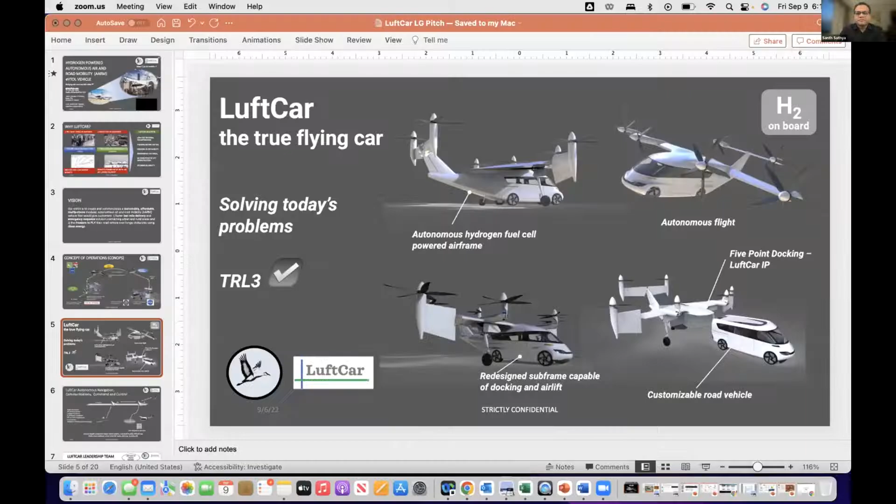LuftCar is trying to create a bridge between the road and the skies. It is an age-old dream for humanity ever since we took up flight, the ability to fly and drive. There have been so many concepts shown in movies, and so many attempts in the past to bridge both modes of transport.

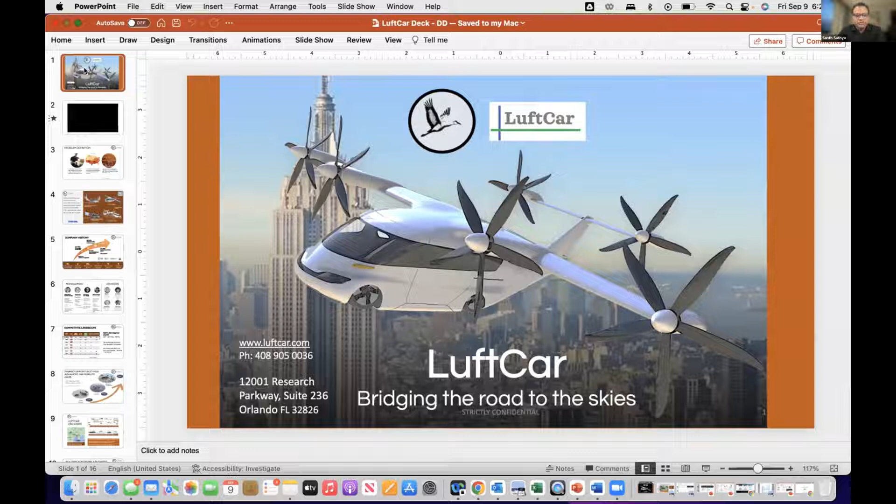I want to show a quick one-minute video before I talk about the problems that we are solving.

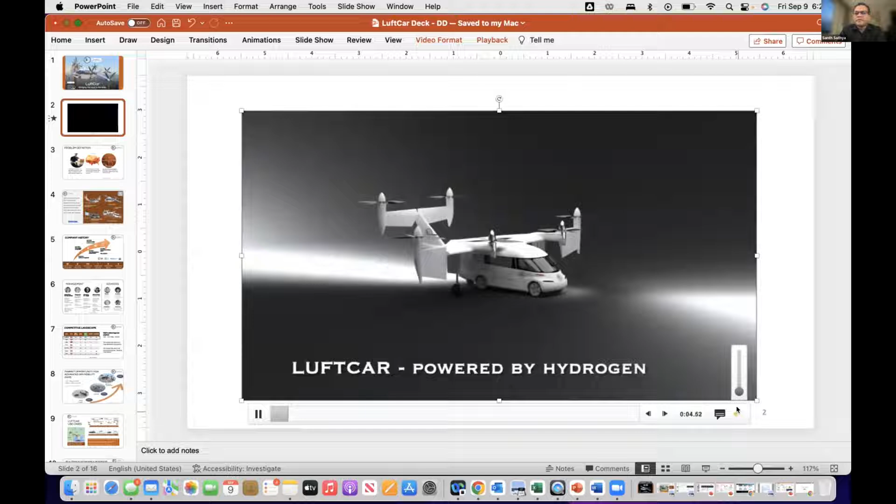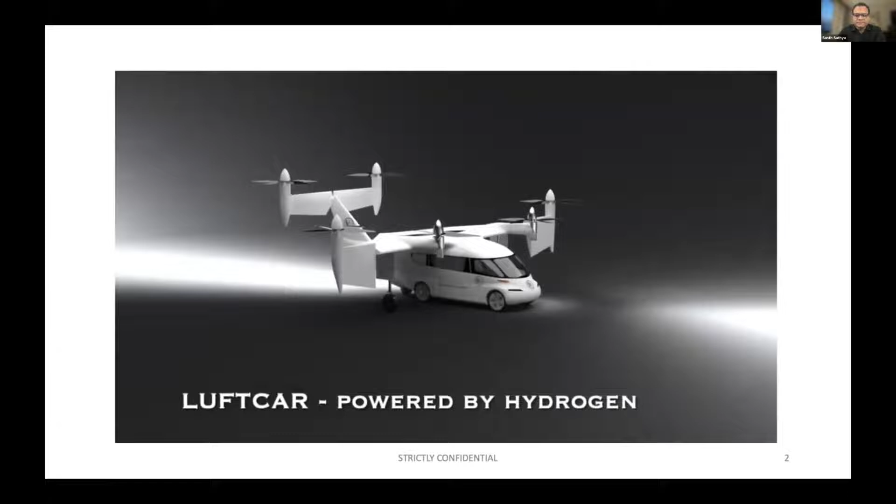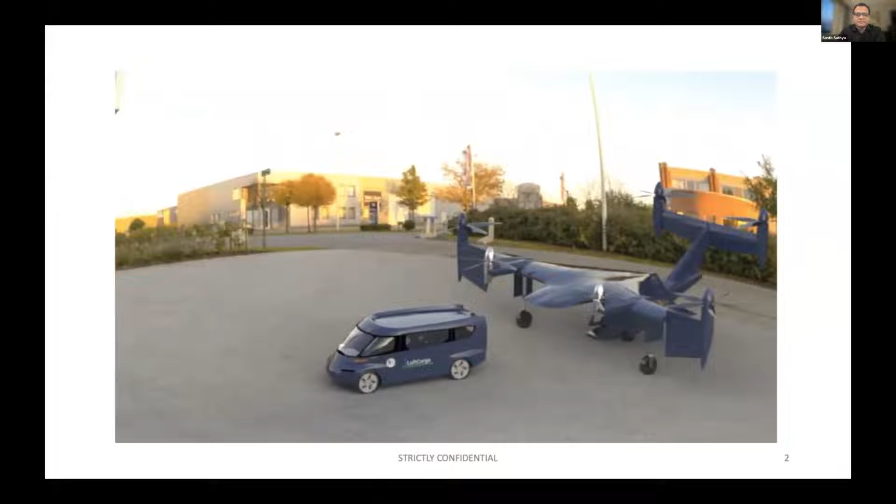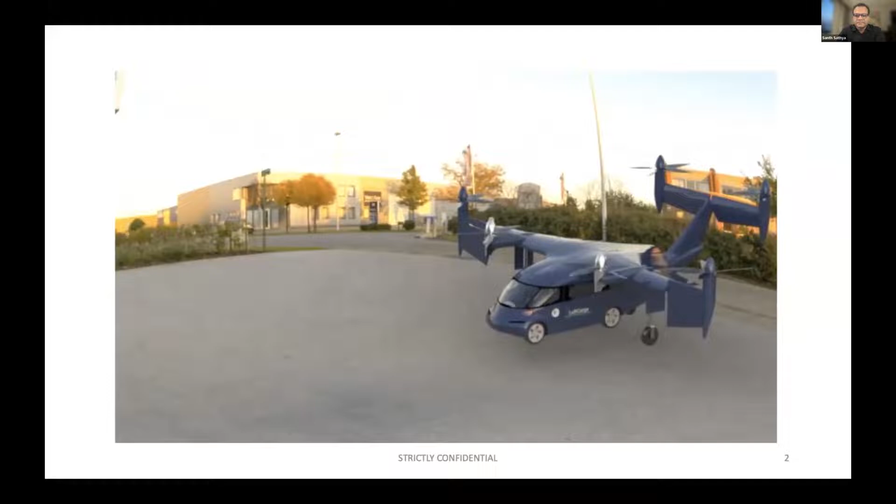Well, if you ever planned to motor west, yeah, sorry about that. Let me play it again. well, if you ever planned to motor west, travel my way. Take the highway that's the best. Get your kicks on Route 66. Well, it winds from Chicago to LA, more than 2,000 miles all the way. Get your kicks on Route 66. Well, it goes from St. Louis, Joplin, Missouri, Oklahoma City looks so pretty, you see. Amarillo, Gallup, New Mexico, Flagstaff, Arizona, don't forget Winona, Kingman, Barstow, San Bernardino. Won't you get hip to this timely tip, Jack, and take that California trip. Get your kicks on Route 66.

All right, so you've seen the video.

The problem we are trying to solve is that today, for door-to-door delivery, drones deliver smaller packages due to payload limitations from battery power propulsion. The batteries are heavy. They cannot lift the high payloads needed that we normally handle in road cargo.

Once you deliver, you're able to deliver to only one single destination, and then you need a warehouse. So it increases logistics cost. We are trying to solve the door-to-door delivery problem by providing this roadability capability.

What we would eventually do is take the cargo and land at a vantage point, and the road vehicle will detach and go door to door to deliver. This way you can provide services to people at their doorstep and carry larger payloads, up to 1,500 pounds. Also, there is really no multimodal transport right now for disaster relief.

There are places where you cannot land in the air, and places where you cannot drive. But with a vehicle that can do both, you can land at vantage points and drive to the site of the incident to provide disaster relief.

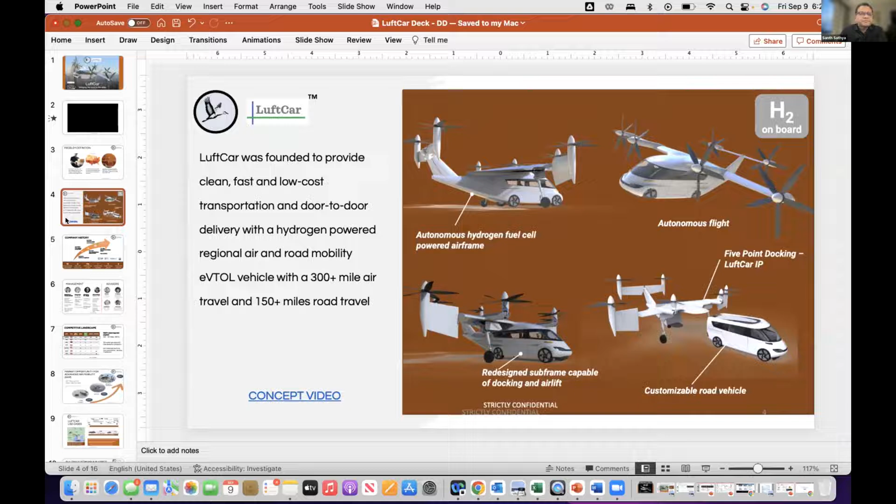We have won quite a few awards, and we are working with the defense. We are trying to get some defense contracts in that area. There's a lot of interest, because this vehicle would be a warfighter vehicle.

We have formed MOUs with airports, because airports will be the places where hydrogen will be made in a distributed manner, and they will be places where hydrogen can be refueled into the vehicles. The hydrogen made in these locations, I'll talk about these LuftCar concepts where hydrogen would be available, will be a unifying factor between aviation, road transportation, and utility power.

We have a strong team. We all come from industry. I myself worked at Ford Motor Company and developed 300 fuel cell cars in the past, and we have people coming from Lockheed Martin and McDonnell Douglas and large organizations from the aviation industry. We are the only concept that's got the air and road mobile capability.

I want to talk a little bit more about the application itself, because that's what you are interested in. The air and road mobility helps build equity in society.

For example, only 20% of the population across the world, in the United States 20%, have access to immediate air travel. They have to drive long distances to go to an airport. They don't have access to quick air cargo, because cargo delivery is limited by freightways. By creating an air cargo industry that is affordable, where you don't have to pay too much for cargo to be delivered by air, you are connecting large communities by delivering medication, food supplies, and other essential items, bringing doctors and healthcare to them, and giving them the ability to commute to work over larger distances.

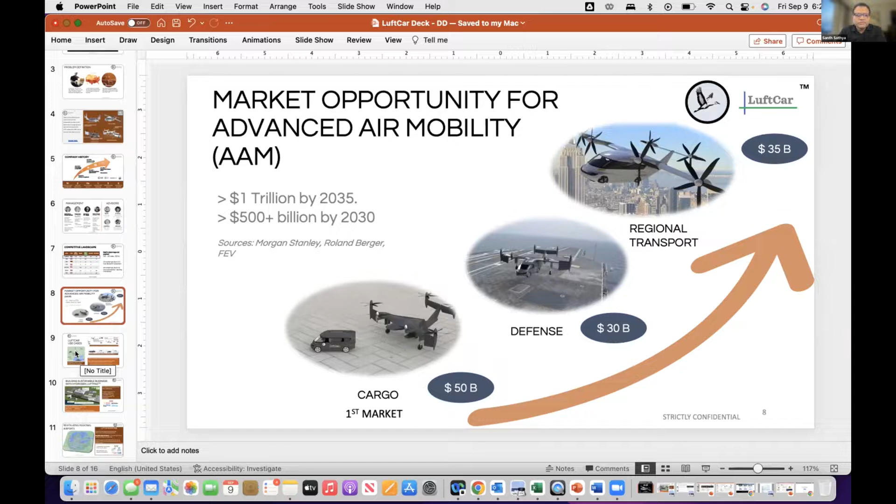So that is pretty much around the application. I want to talk a little bit about the hydrogen lift pads. Hydrogen is going to be the unifying factor for our energy solutions as the world moves towards the hydrogen economy. We are partnered with airports, hydrogen producers, and hydrogen storage manufacturers, and our plans are to install hydrogen refueling facilities in airports and also in large parking lots where LuftCar can land.

We don't need too many lift pads across, like in other business models where they need vertiports very often. We need lift pads every 50 mile radius to give you that sustainable mode of transportation. And that's where it is. Let me pause now and open up for questions. Thank you.